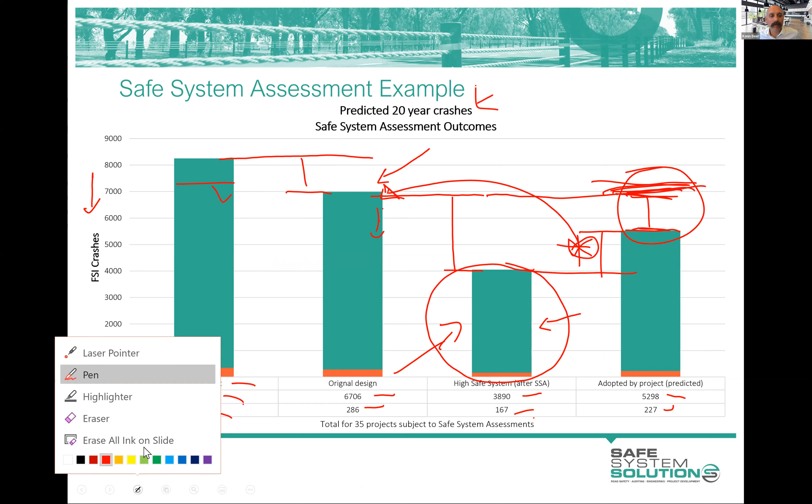So there's a huge amount in that one little graph, but I'll see if anybody has any comments or questions about that. I find it quite interesting. If you do, either pop them in the chat or feel free to pop your hand up and talk to it.

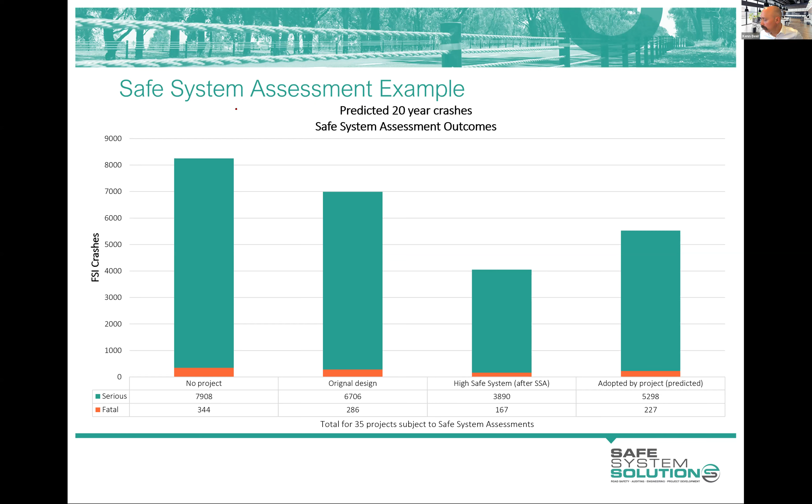Okay, so a few benefits of the safe system assessment process. I think a lot of you who have done safe system assessments or had them done on your projects can probably see some of these already. It's a great way of determining how well a project aligns with safe system principles, and that sounds obvious and easy, except that's something we have not really had in the past.

We've had people's opinions on what's good and what's not - people with ideas that some particular treatment was safe system and other treatments were not. Like people who thought, well, safe system is just wire rope barrier and roundabouts. Well, those just happen to be treatments that in a lot of situations have good alignment with safe system principles. It's not to say that is the safe system, but those principles play out well in a lot of scenarios.

But this actually gives us something to quantify, something to go forward with and give a report card on a project's alignment with safe system principles, with some scores to it. That's exciting. There's bits of subjectivity to it, and other little things, but overall that overarching idea that we're able to do that is pretty exciting.

Okay, so we're not at all saying, since this safe system assessment came about, that road safety audits don't perform a very important function in our infrastructure projects in road safety assurance. We say safe system assessments do a slightly different job, and the way they're done and the way they're presented lend themselves to that concept, draft, early feasibility stage of projects.

And when there's meat on the bone, road safety audits are better served. I mean, the safe system assessment process can be done at a detailed design stage too - the process works.

I just want to warn you now, you're the least likely to get change to occur if you do that. You're not really dealing with options. Occasionally you'll get a few, but mostly you get a score and then a list of improvements, and your improvements might be fundamental changes to the scope. But those suggestions are just not going to be taken on.

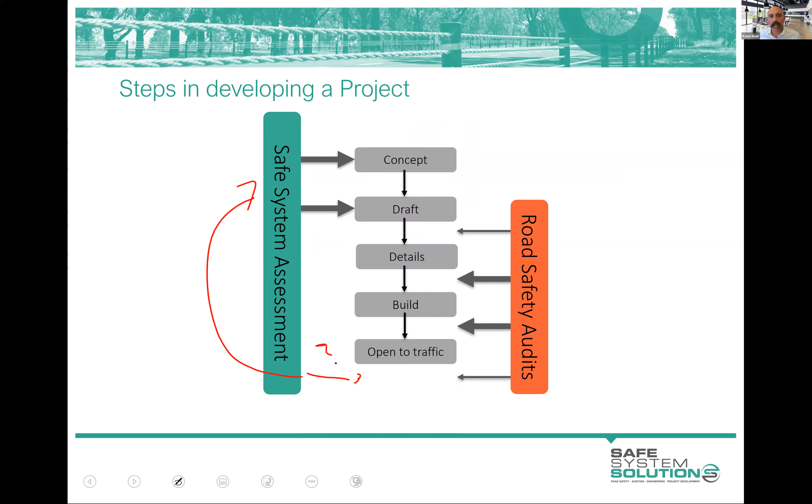Open to traffic and existing conditions, you might do another assessment down here just for feedback and as a comparison, but that's a maybe. So that's the sort of suggested way that it's rolled out.

Now, the comment that often comes in is, why are we having to do this? Why another process? We do road safety audits, so that's going to cover off our road safety.

The severity of crashes really should be looked at in a road safety audit. It always should have been, because that was how we arrived at a risk rating for likelihood and severity. But there was a tendency in the auditing industry to be more focused on the likelihood.

I just use the classic example of your signalised intersection in an 80 km/h or 70 km/h road environment. The audits we were seeing of these, at no point mentioned the inherent energy associated with the vehicle that runs the red light. There was a lot of wonderful auditing around why people might run that red light, be it see-through effect, sightline issues to the signals, or other things like end of queue, the phasing, the line marking, signs, and blocking -- different, really great stuff, important stuff.

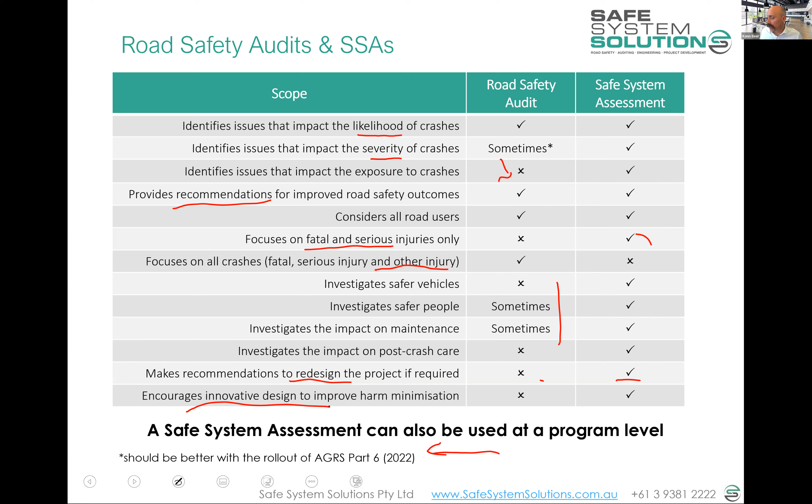Now, that's something that's originally been developed by the Victorians, then the South Australians have taken it on, and the New Zealanders are now doing that too. So generally our Queenslanders doing it, but they've called them full and light. So it's kind of saying there's two different ones there - I'll take you through the differences between those shortly.

But then the safe system assessment team is selected, and that'll be for the project - we'll get a team together. Usually they're getting external consultants to do it, or finding another team within the region who are fairly independent from the project and know how to do these assessments.

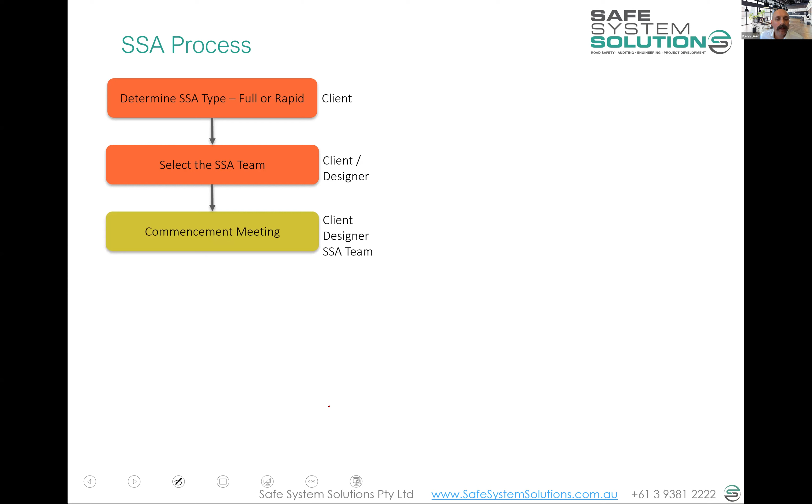And then there's some exchange of information, explaining the designs, and also getting a bit of context for the project and its objectives. That helps with putting those ideas for consideration down on the table, because you know the context of the project, what's trying to be achieved - so you're not suggesting that the Princes Highway goes to 30 kilometres an hour with whatever traffic calming, because the objectives of the project aren't aligned with that.

Then the site's inspected by the Safe System Assessment team, and you do that to look at the existing operations of it, imagine that being built, the tie-ins, how it's all going to function.

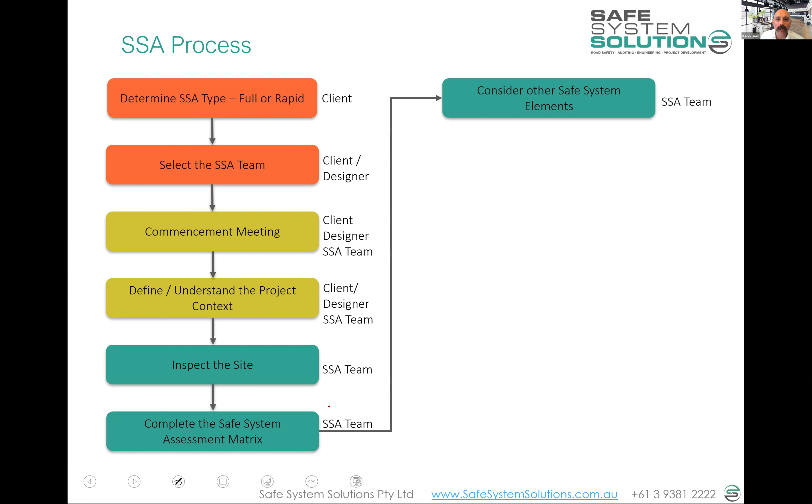You complete the Safe System Assessment matrix for the existing conditions. Then for any and all and every design option you're given, consider the other elements of the safe system if this is a full safe system assessment. Then you come up with treatment ideas that will make each of the designs better.

Do your reporting using one of the standard templates, which you now have a copy of. Then it's handed over to the client or the receiver of that, and they make their own responses. There's a column for responses, whether they're going to take that on or they can't do it for one reason or other, or they'll do something else.

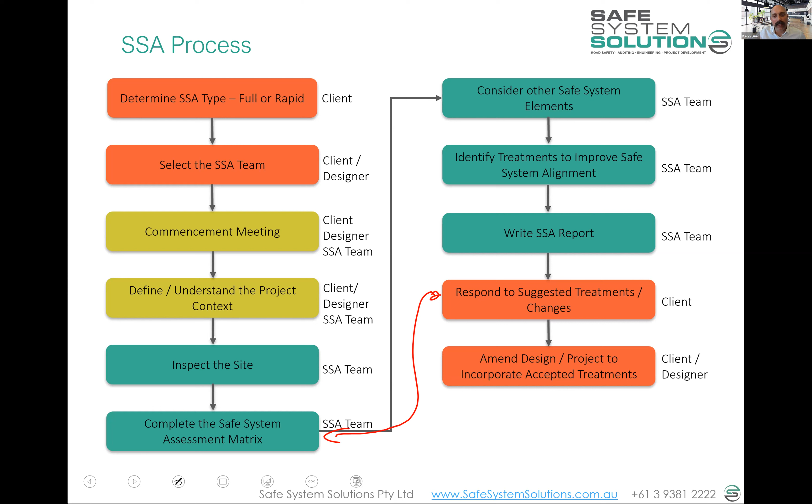And they make those changes, and then they incorporate them into the treatment. Now, at this point, people will often go back and ask for another scoring. I say, yep, we're going to take this on, not this one, and we can do this instead. Can you give us a new score of our adopted design? I like that practice because it gives you this nice, clear story.

The higher the bar, the worse it is. You've got that as your original existing conditions, and maybe a design got you to there, or design option 4 got you to there, and after you've done the safe system assessment, it went down to there. You're showing, hey, look, we were improving things anyway, but we've improved things even more now after we've gone through this process.

Alison asked a great question there around, is it important for the Safe System Assessment team to be independent from the project they are looking at? So there's no specific clarity around that in the Austroads guide.

And we do like the idea of designers and others thinking through projects, utilising the Safe System Assessment matrix on their own project to get an idea of it. The industry practice now, though, is for it to be an independent team to undertake the Safe System Assessment.

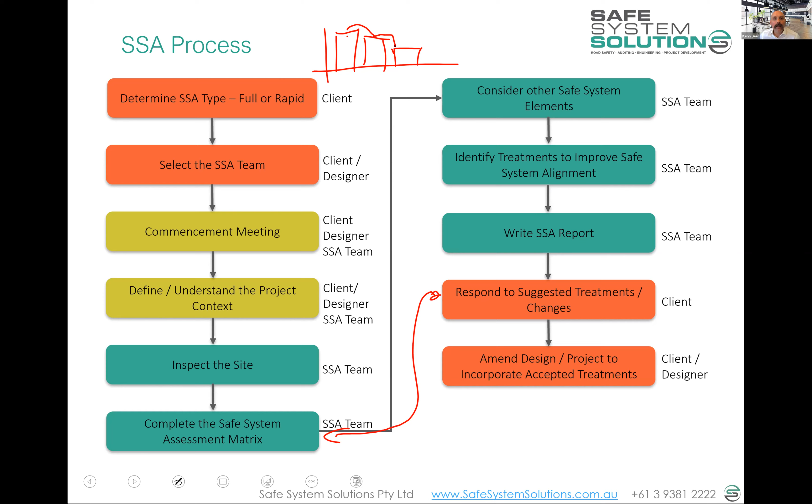Sorry, I'll just read Brad's comment here - touched on this last week. Can you comment on who should undertake safety assessment? Does Austroads say? What do the other states say?

Great question, and it links perfectly with what I'm about to show you from the Victorians. I mainly focus on the Victorians and South Australians here, but I will talk to what the Queenslanders are doing, and then the New Zealanders.

We've got a raised hand here, so I'm going to see if Mike wants to say hi. Hopefully, Mike, you can unmute yourself now if you did want to talk, or maybe you accidentally pressed that. Hello, hello - sorry, it was a mistake. That's all right, it was lovely to hear from you anyway. My apologies, I'm sorry. Okay, I'll send you back. But that was a good example of how easy it is to say hello if you want to talk through a question or analyze something.

Okay, so let's have a look. The Victorians are still using the VicRoads website, even though they've moved to a Department of Transport model, but VicRoads is still there. They've got their safe system engineering page with their guidelines, and those templates that I gave you on your memory stick and in Moodle.

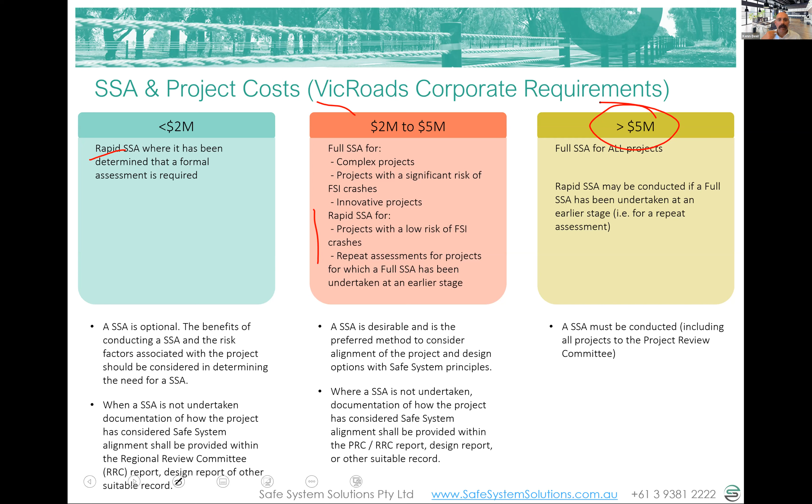So the rapid, or full, or light as the Queenslanders would call it—the full safe system assessment has that commencement meeting style discussion, a bit of a workshop, good understanding of the project background and context. Get out on site, assess the existing conditions and all the options through the matrix, look at all those other pillars of the safe system, design changes, recommendations, full reporting, and then the project team takes all that on board and rescores if necessary.

You're not getting the full context of it, but you're able to generally talk about things. Though I'd say significantly more often than not, we still do a site inspection for a rapid system assessment.

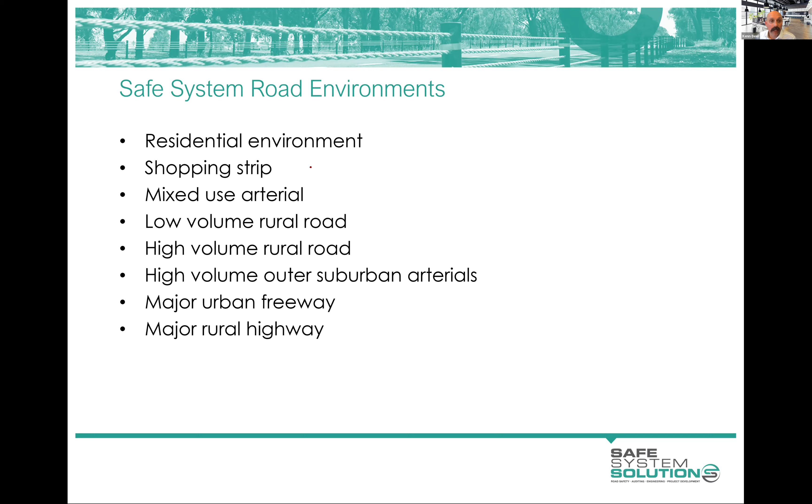So I thought we'd cover these off briefly—really, what features are we aware of at the moment that align highly with safe system principles, so you can put things on the table for consideration that would have higher alignment. For a few of these, I'll have you type in some ideas in the chat—we'll do it for this one and maybe one other.

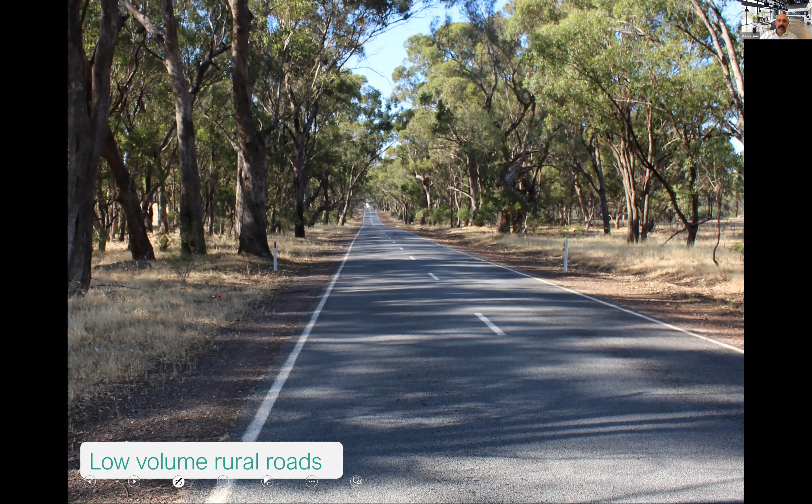When you get higher volume - and this doesn't look higher volume in this photo, but you don't want to take your photo when there's actually vehicles on the road - these are the ones where there's the genuine need to keep high speed because of the higher volume, the freight movement, and the vehicle movements. And these are the ones where we should be investing the infrastructure funds to keep the high speed.

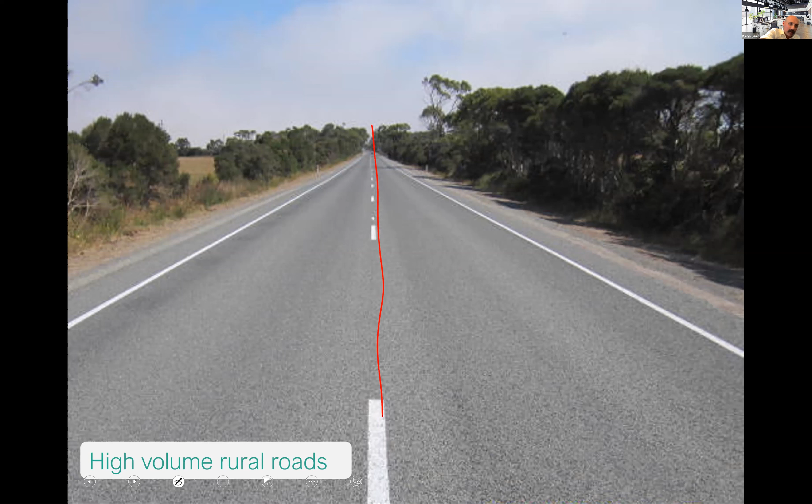And that really does end with central barrier systems, outer barrier systems. It's got some formation work to do and there's some cost in it, but that's where we want to keep our speeds high for the movement of goods and people.

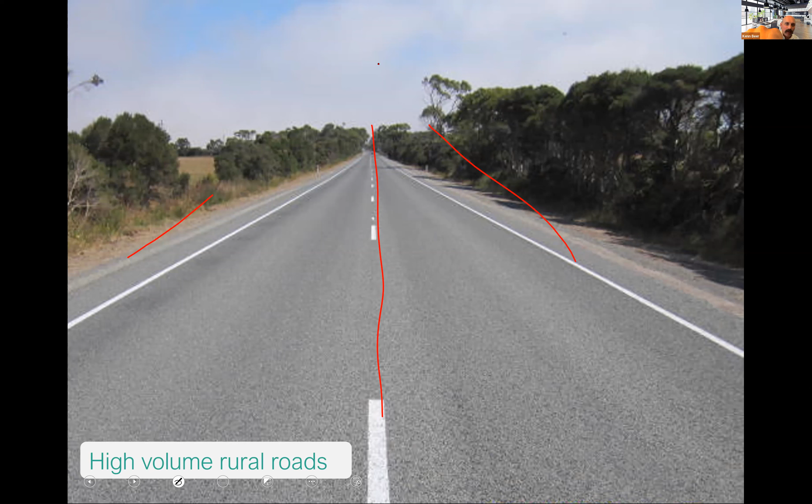And then within those, if you're utilizing that central barrier system and you can get roundabouts, I like compact roundabouts, as you've been seeing, because I don't like spending money if I don't believe it's giving me great value. I think the compact roundabout does almost as good a job as a full roundabout at about under half the cost. So anyway, it provides a good opportunity.

Then if you've got that, you can collect a few access points and other things and have a nice U-turn facility, so they've got to go that way and U-turn. That removes the cross traffic crash, simplifying a lot of that, and it's providing a safe turnaround spot while also addressing the intersection. So at a theoretical level, that plays out quite nicely.

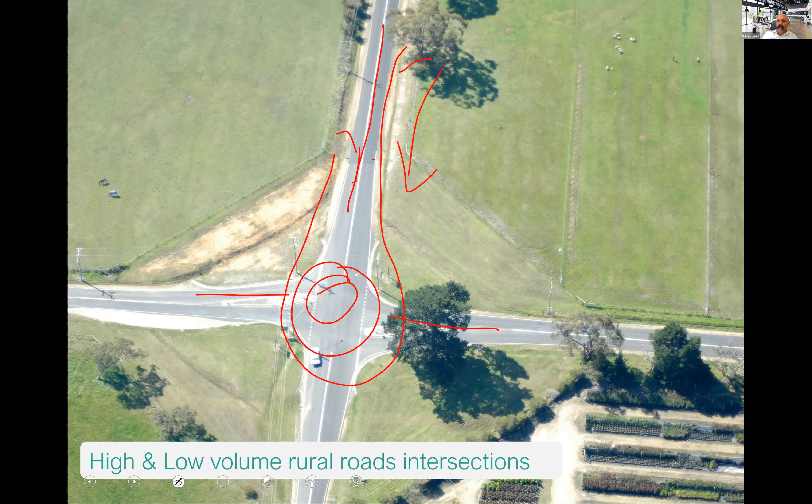It's good to often strategically plan out a route over a long period of time and start to think about these, and which features you put in at what times to roll things out in the most efficient manner, as I think many of you are doing. I'll jump through these last ones fairly quickly.

Higher volume outer arterial network - again, if this is recognised as traffic priority routes, we're immediately then understanding that things like bike lanes would have to be a separated bike facility, with raised features for them to cross. You cannot be mixing higher speed traffic with bikes like this. They have to have their own separated facility. The physics of it just doesn't work.

Actively trying to provide underpasses, overpasses for pedestrians. And New South Wales does these actually pretty well, better than a lot of jurisdictions, for some of their urban arterial network.

But then still your large intersections, you'd be expecting speed management through there with raised platforms or the like, just to bring speeds down at those significant conflict points where we know you're going to get a concentration of death and serious injury.

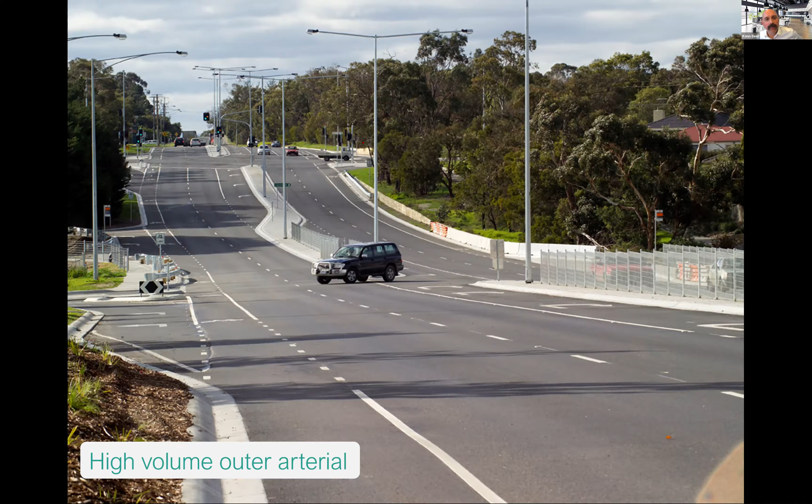Motorways, freeways run really well aligned with safe system principles from the perspective of single direction travel, so full separated carriageways, on ramps, off ramps, so the speed differentials are good. No fixed hazards - the barriers themselves, rigid barriers, are generally appropriate in a lot of these locations, but do have a little bit more energy going to the occupant of the vehicles. But really where we see these roads start to break down in terms of their alignment with safe system principles is as they break down in terms of traffic flow there.

We see when a road or motorway is free flowing, it actually performs extremely safely for the number of vehicles it's got there. When it's absolutely stuffed, so vehicles are hardly moving, it performs very safely as well. You get a lot of minor fender benders and things like that, but generally very safe because there's not enough speed and energy to cause injury.

It's as the freeway starts to break down the traffic flow that we see the speeds and the crashes, and that's our time to start to try to manage the freeway. And so managed motorways are really the go, and that's where you've got lane management, speed management, ramp metering - so signals on the ramps - and you're really starting to control that.

And major rural highways, well, we know the sort of Pacific Highway and the Hume and those sort of things are really going to be full containment of barrier systems pretty much until all the vehicles have sort of lane detection and the like and are not leaving their lanes. Even some of them may still do that.

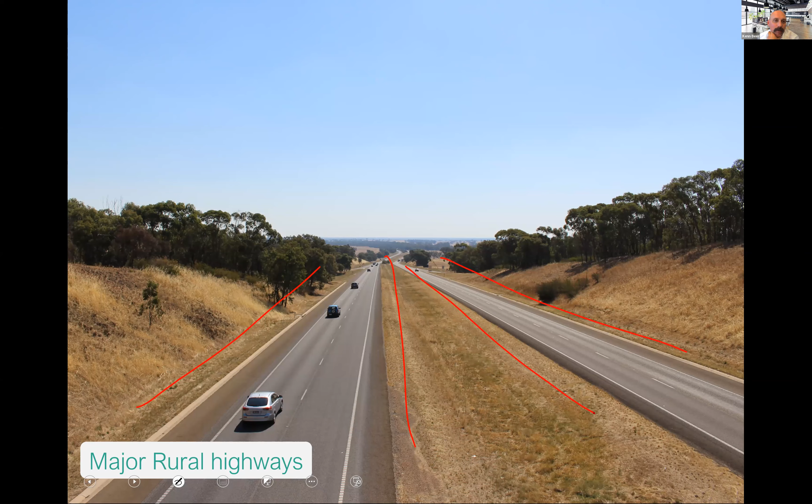The intersections, as we talked about - these grade separated, obviously, is the preference. Grade separated with roundabouts at the interchange of the grade separation. We know that if you grade separate, you create an off ramp and the like. It's fairly simplistic, but you want to put roundabouts there as a general rule. Otherwise, you've often still got a high-speed road through there and a high-speed intersection - lower volume, high-speed intersections - but so that's the ideal.

For ones where you can't afford these grade separations, roundabouts would be nice in theory, but we know for freight productivity and the like, a lot of the times people don't want to do that on the major national freight networks and the like. This is where I think the option of that sort of long acceleration lane, merge, enough space to then provide that U-turn facility with a big merge option back, as opposed to any sort of crossroad like that. So this way you get the vehicles up to speed, the energies are good, nice run out areas. Again, you get that speeds and angles comparatively good. So in theory, that's how you can sort of get quite well aligned with safe system principles without having to either significantly reduce the through vehicle - the bullet vehicle speed - or grade separate.

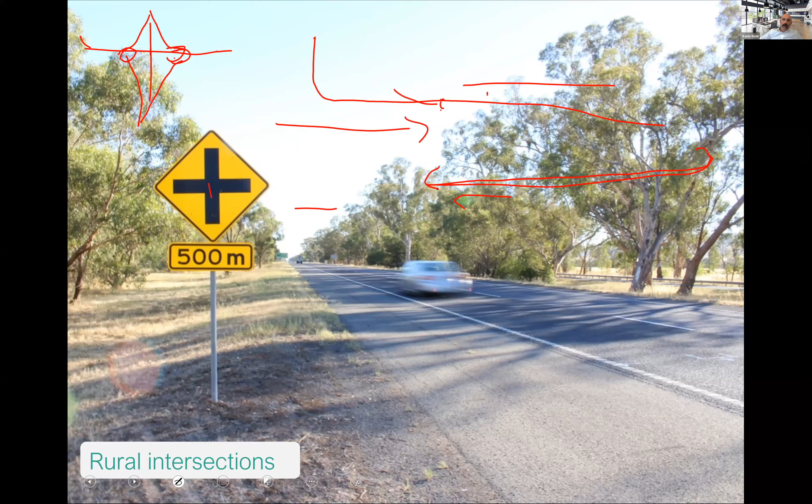Okay, so that's that. I won't subject you to extra content because I think you've all done pretty well. Thoughts about seagull type intersections - they seem to have a bit of controversy about them. Yeah, so seagulls are fascinating because they do have that.

Yeah, there's that element of a better angle of crash for that merge point. Unfortunately, though, it's merge from the right, which is challenging. If you have enough space, merge from the right can be okay, but certainly articulated vehicles and the like have a lot of trouble in that merge from the right.

The research on seagulls and road safety indicates it's quite dependent on quite a few factors. But the New Zealanders came up with this seagull intersection assessment tool, which is a spreadsheet publicly available, and I think it's really good. I will find that and send it around because I think it's interesting to have a look at.

But certainly, even like a seagull, you still got that first cross traffic. So as you exit, you've got an immediate cross traffic right angle crash. So that's not going to be great alignment with safe system principles anyway. Even signalizing it, you still got that potential challenge there. So compared to a roundabout, it's not anywhere near as good, but it does provide that movement of through vehicles in a faster manner.